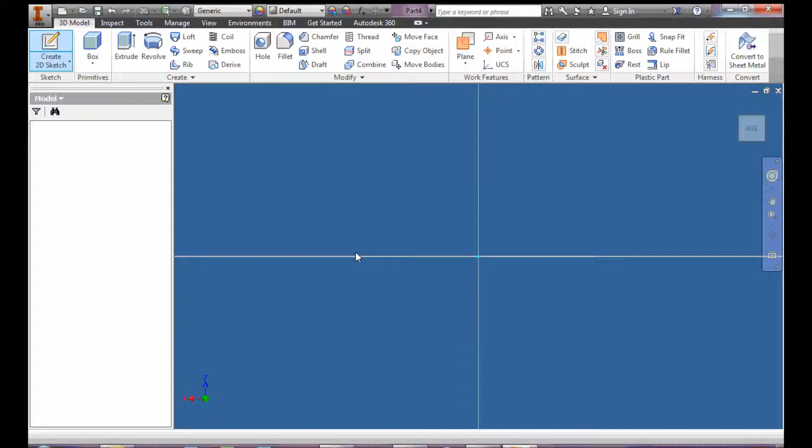We're going to create 3 standard parts and then put them together and assemble them. Then you want to create a new sketch. Select this base plane here, and that will get us onto the X, Y coordinates, making it easier to understand later on. For the first sketch, all I'm going to do is draw a rectangle.

I'm going to make the rectangle 40 by 50 millimeters in size. I can use the middle button or the wheel button on my mouse just to zoom in and out.

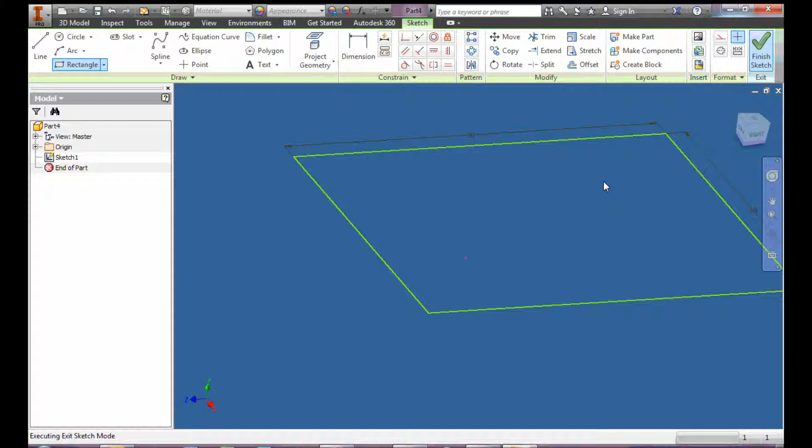Quickly finish the sketch and extrude that. I'm going to extrude that 10 millimeters, that's okay. Obviously the sizes don't really matter just now, it's not that important.

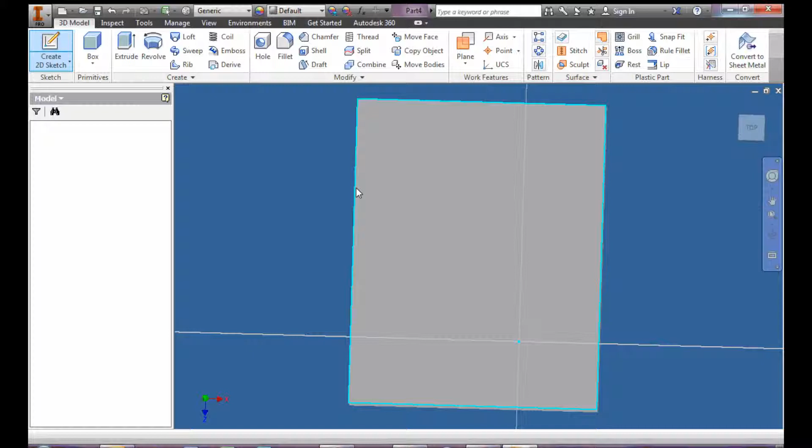The next thing I want to do is put a hole in here. So I'm just going to create a new sketch, select this top face and draw the circle. Now if I zoom in on here, you can see that the cursor changes to green.

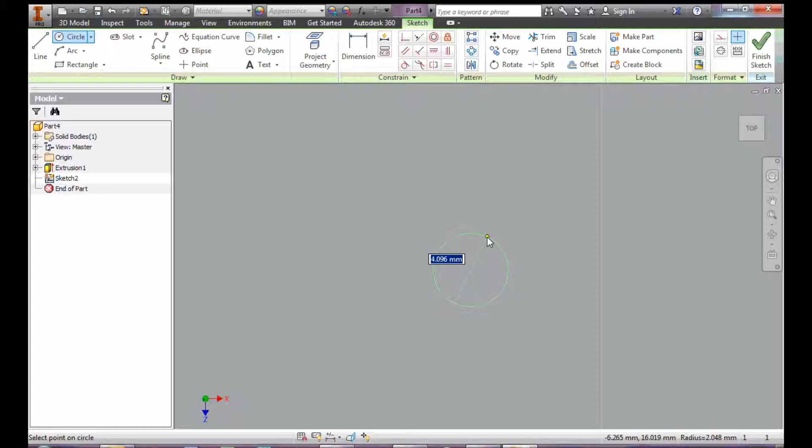The green means it's locked into the middle point. And if I bring this down, I get 2 green arrows. I'll just zoom in on there. You can see that. I'm going to make that 3 millimeters in diameter.

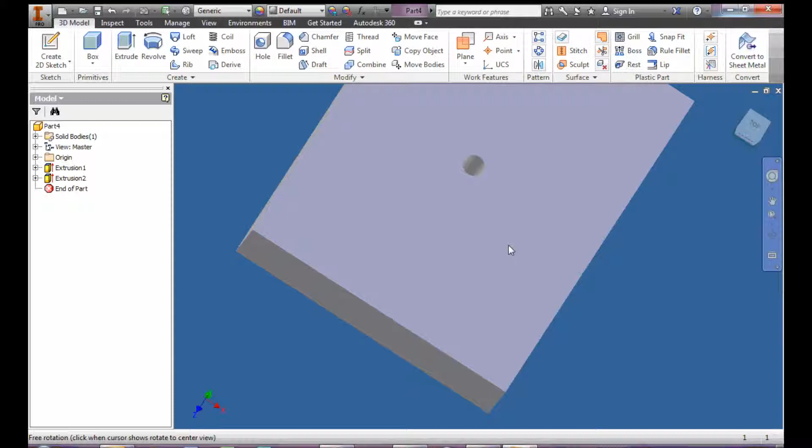Finish that sketch, and then all I want to do is make a hole in there. So I select the circle. This time, instead of joining, I'm going to cut 10 millimeters, and then I've got a hole through that block. Nice and easy, so that's one part done.

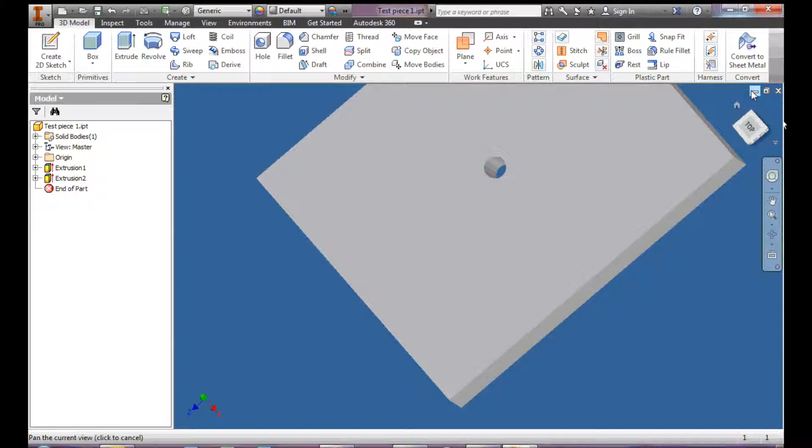So I just quickly save this, click on save at the top there. Test piece 1, for example, and then minimize that. I want to create a new part. Again, metric, standard millimeter, and create.

This time I'm just going to make exactly the same thing, just going to make a little rod to go through there. Now I know the hole was 3 millimeters, so I'm just going to make this 3 millimeters as well. Finish that, so all I have is a circle, and we'll extrude this circle.

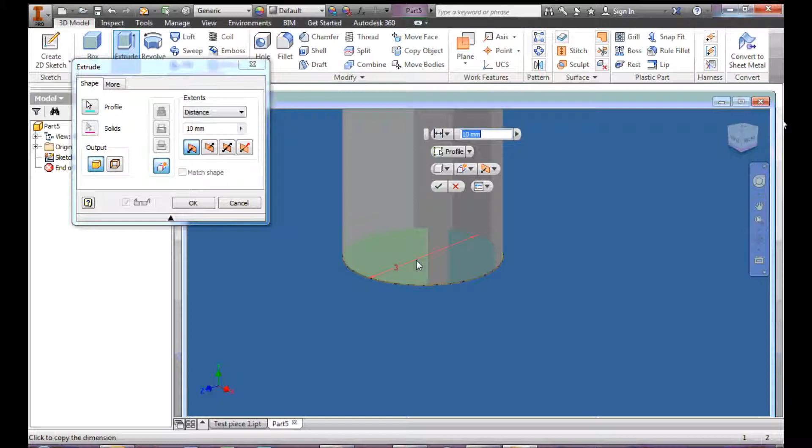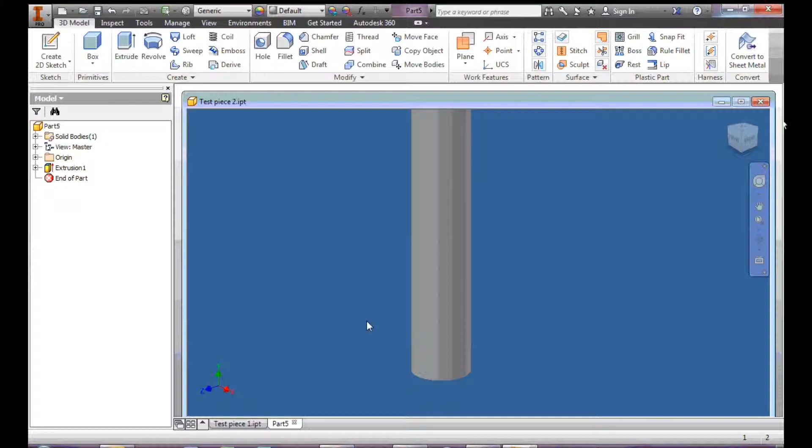This time we'll make it 20 millimeters long. So I've got 2 parts. Save this one this time, call this test piece 2. And then minimize that, and then we'll do another one.

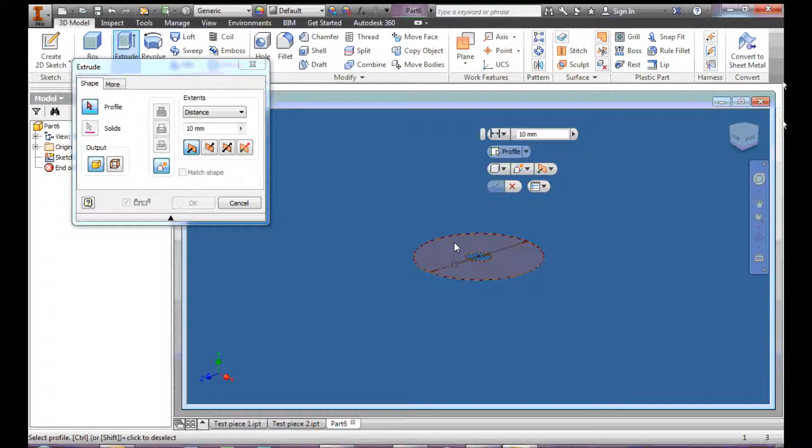Again, metric, standard, create. This time, create a new sketch on here, and we'll make another 3 millimeter circle. And then I'll put another, let's say, 15 millimeter circle around that. Finish that, and this can be my gear or my pulley, so that's 3 millimeters in thickness.

We can mess around with the colours and change the colours up here, changing the materials or changing the colours, if you wanted to make this gold, for example.

So now we've got 3 parts down here. Oh sorry, got 3 parts, three test pieces. I want to assemble them.

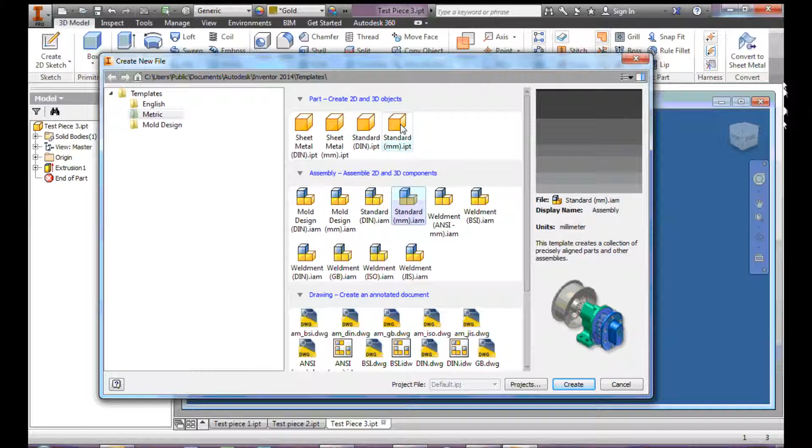So this time we go into new. I'm still in metric, but this time we want standard assembly. Notice how the visual icon has changed from a single block to these 3 blocks.

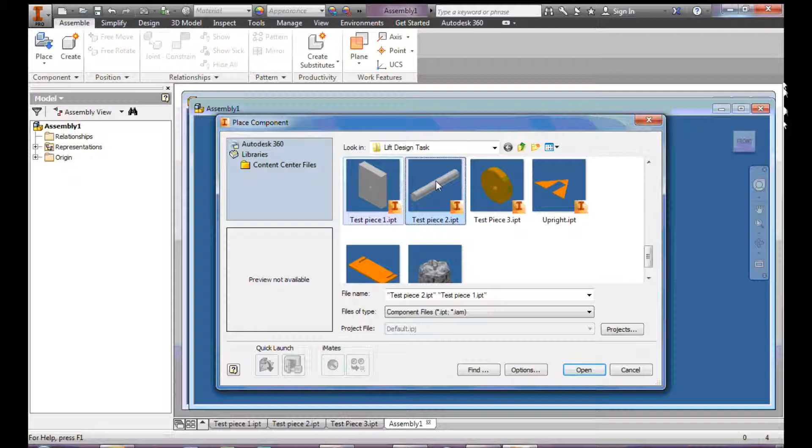And when that opens up, this name changes. We're now in assembly mode, and I want to place my 3 pieces. Now I've called them test piece 1, 2 and 3. You can highlight them by pressing Control and place them in there. Just press Escape and get rid of them.

Now I need to assemble these parts together. They are all free floating in midair just now. So constrain - as I've mentioned before in other tutorials, constrain is like you're fixing or gluing the parts together. You're telling the computer how they go together.

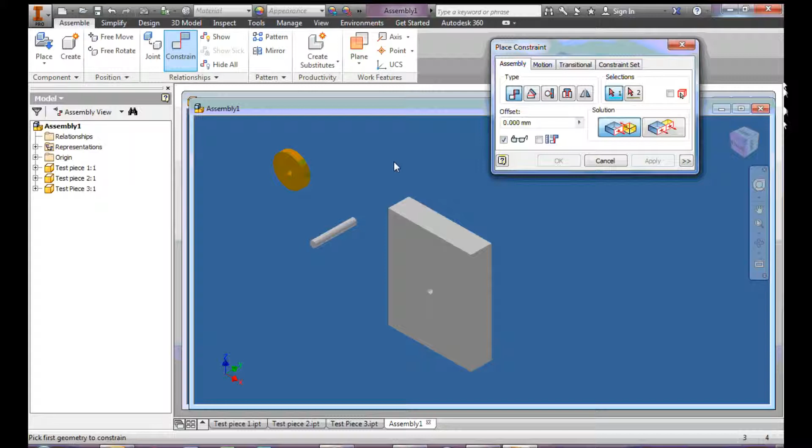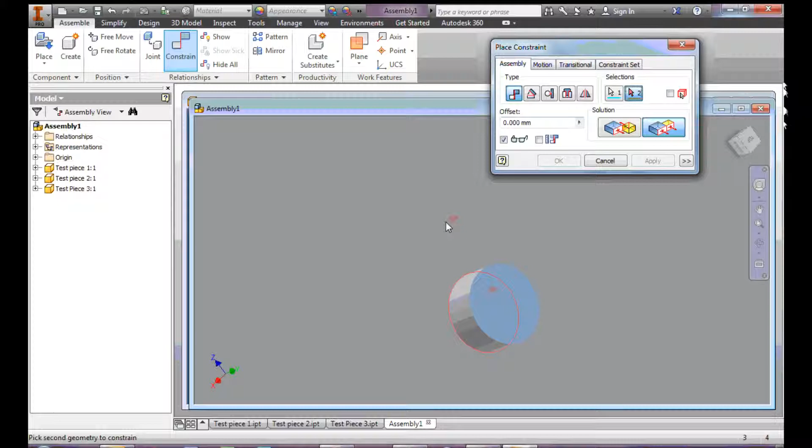So this time I want to pick up this center line for this bar here, or this axle, and I want to place it through the center of this part here. What I can also do is spin it round, and I can make this time flush - the top face with this top face of here. So now this rod can't move, it's fixed in the center and it's fixed flush with the back of our block.

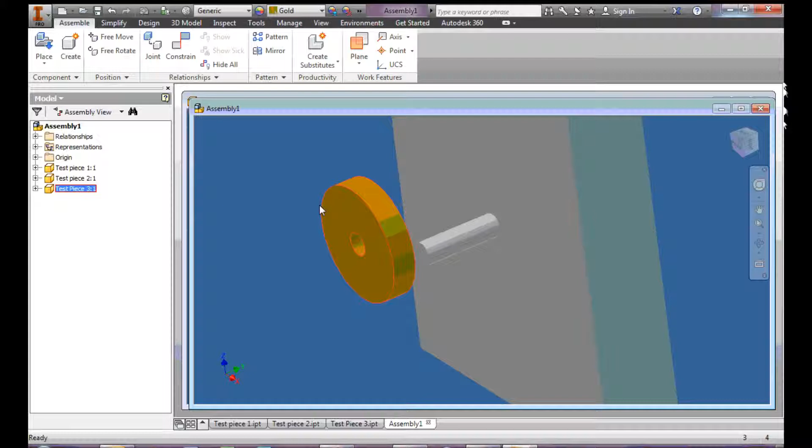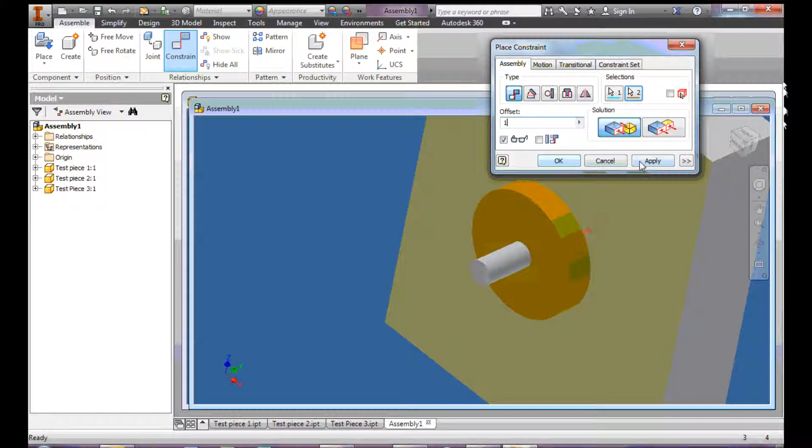Can now pick up the gear or the pulley and do exactly the same - center line, notice the center line is this long short line, this chain line, and apply that. And this time if I want to mate this inside face to this face here, but I probably want to give an offset so it doesn't actually rub totally against it, so I give it an offset of 1mm, and then what I've done is I've added those together, but I've given it a bit of an offset.